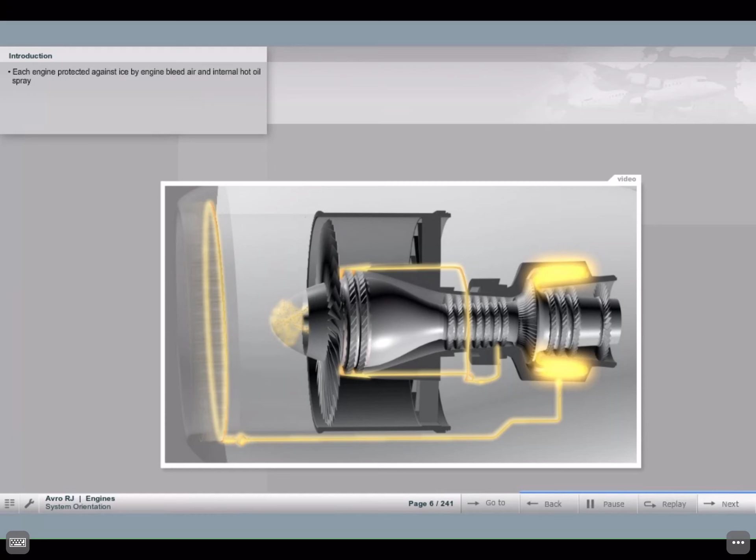Each engine is protected against ice by the use of engine bleed air and internal hot oil spray. An overheat detection system provides fire warnings, and 2 fire extinguishers on each engine may be used to stop the spread of fire.

The engine is comprised of 4 modules: a fan module, a gas producer module, a combustor turbine module, and an accessory gearbox module.

The air passing through the fan is divided by a splitter. Most of the air is accelerated through the bypass duct, generating most of the engine's thrust. The remaining air is compressed by a 2-stage low-pressure compressor called a supercharger and delivered to the gas producer module.

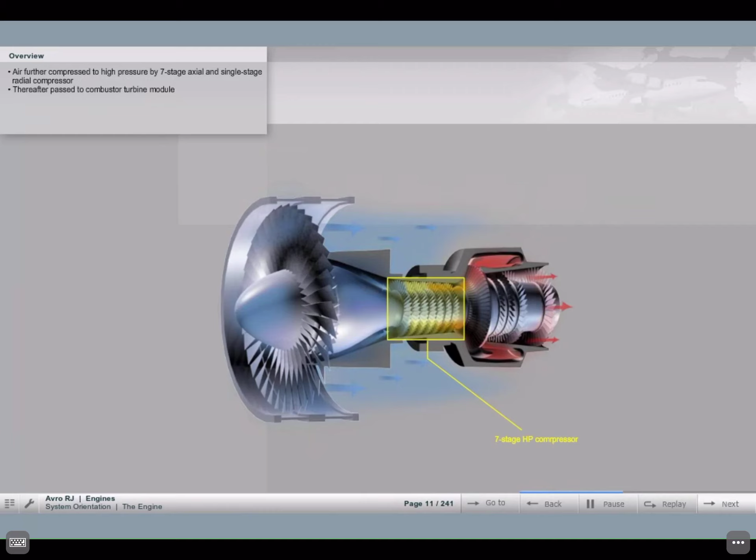Here, air is further compressed to high pressure by a 7-stage axial compressor and a single-stage radial compressor, before being delivered to the combustor turbine module.

Fuel is delivered into the combustion chamber by multiple fuel nozzles. The fuel-air mixture is ignited and exits via a 2-stage high-pressure turbine, which drives the high-pressure compressor stages.

Before exiting to atmosphere via the jet pipe, the hot gases are passed through a 2-stage low-pressure turbine, which drives the 2-stage supercharger and a fan via a reduction gearbox.

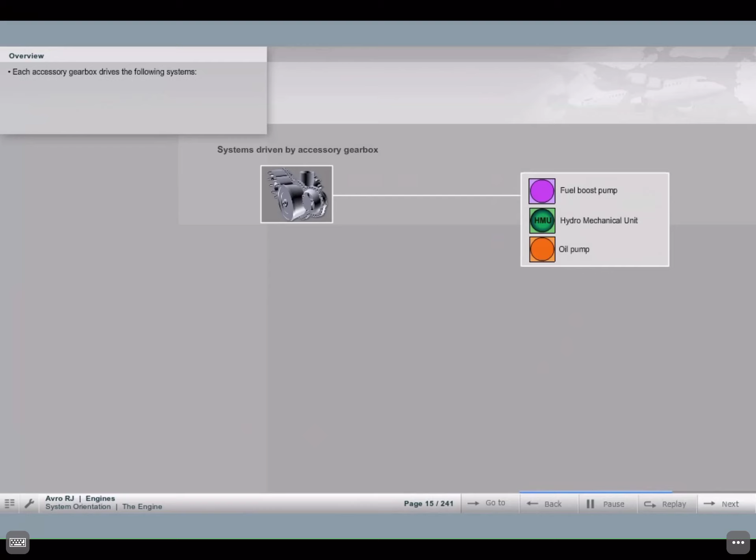Each engine is fitted with an accessory gearbox which is driven by the high-pressure shaft. The systems driven from the accessory gearbox differ depending on the position of the engine. Each accessory gearbox drives a fuel boost pump, a hydromechanical unit (HMU), and an oil pump. In addition, it drives a hydraulic pump on the inboard engines or an AC generator on the outboard engines.

For engine start, a starter motor is fitted to each accessory gearbox. A drain mast is fitted to the bottom of each engine cowling and contains sealed drain lines for the system shown here.

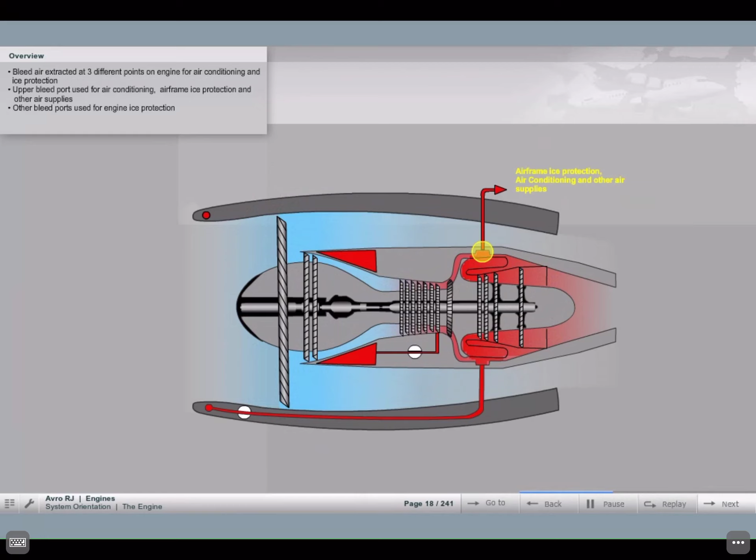Bleed air is extracted from 3 different points on the engine for air conditioning and ice protection. The upper bleed port is used for air conditioning, airframe ice protection, and other air supplies. The other bleed ports are used for engine ice protection.

Engine anti-ice. The fan spinner is continuously anti-iced by an internal oil spray. The air intake lip and the airflow splitter are separately anti-iced by hot bleed air taken from the final stages of compression.

Hot air can be bled via 2 engine anti-ice valves on each engine, controlled by a single switch on the ice protection panel. The valves are pneumatically actuated and electrically powered shut. Selection of engine anti-ice illuminates engine anti-ice on the central status panel.

When the airflow splitter anti-ice valve is open, engine valve not shut illuminates on the ice protection panel. This indicates that hot air is being delivered to the splitter.

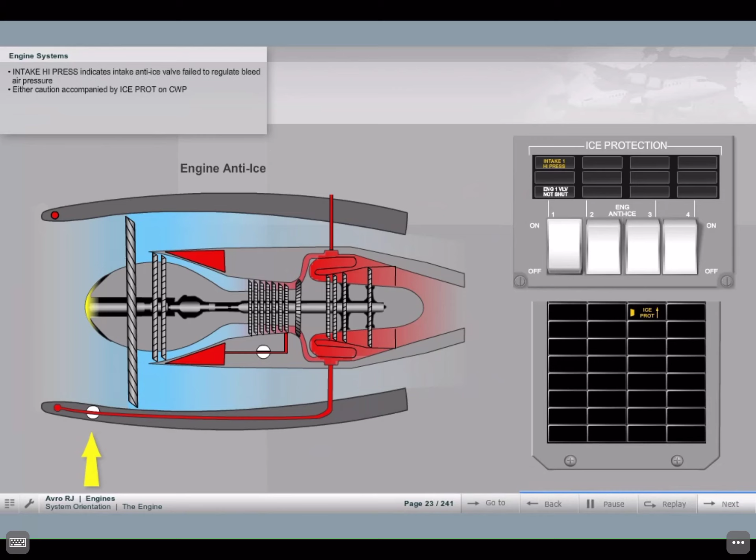To prevent engine surge, the engine anti-ice valves are automatically opened during engine start. To prevent high EGT after start or cutout, engine anti-ice is selected on before start.

Bleed band. In order to allow correct response of the engine during starting and periods of acceleration or deceleration, air is bled from the high-pressure compressor by opening and closing of a bleed band assembly, controlled from the FADEC.

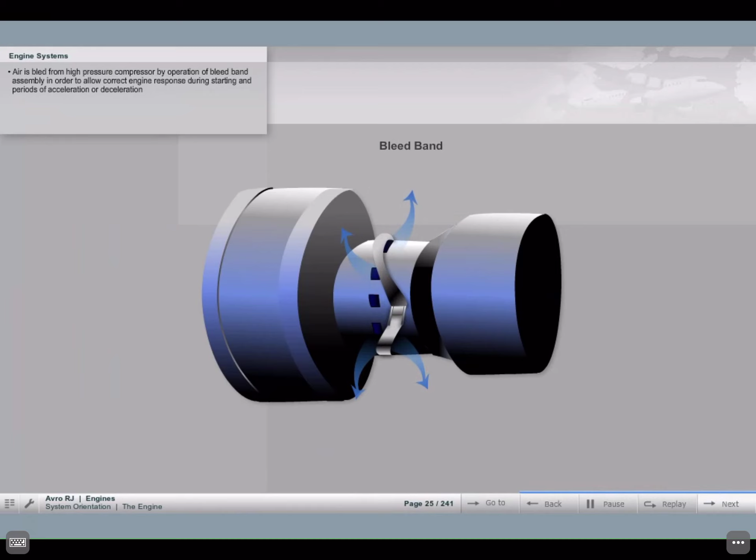Fuel system. Fuel is delivered by the AC boost pump in the wing feed tank via a low-pressure shutoff valve, which is controlled by the fire handle, to the engine-driven low-pressure fuel pump.

It then passes through a fuel heater to a low-pressure filter. Should the filter become blocked, filter clogged will appear on the central warning panel.

Fuel then passes through the hydromechanical unit (HMU), which contains a high-pressure pump, a high-pressure shutoff valve, and a metering valve which under normal operations is controlled by FADEC. The high-pressure shutoff valve allows the engine to be stopped and is directly controlled by the thrust lever. From the hydromechanical unit, fuel is fed to the fuel nozzles in the combustion chamber.

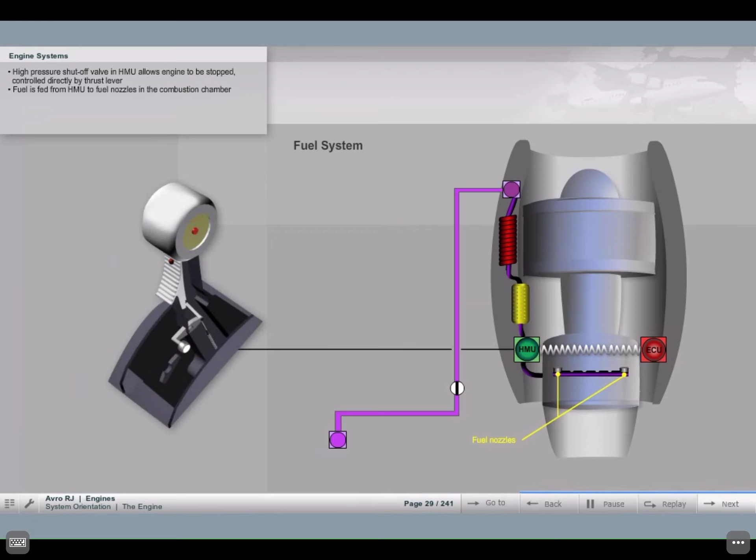Ignition. During engine start, ignition is provided by either ignition system A, B, or both. Ignition is automatically terminated when combustion becomes self-sustaining.

The ignition system is not normally used after engine starting, but continuous ignition A or B must be selected on when operating from contaminated runways and when flying through areas of severe turbulence or heavy precipitation.

Engine ignition is also used during in-flight engine start. This is covered in the engine starting module.

Oil system. The oil system is completely self-contained and includes an oil tank, oil pump, oil fuel heat exchanger, and an oil filter for each engine.

Oil is replenished at the oil tank, which contains a dipstick and a transmitter for the oil contents gauge on a flight deck triple gauge. The oil pump, which is located on the accessory gearbox, also contains the oil filter.

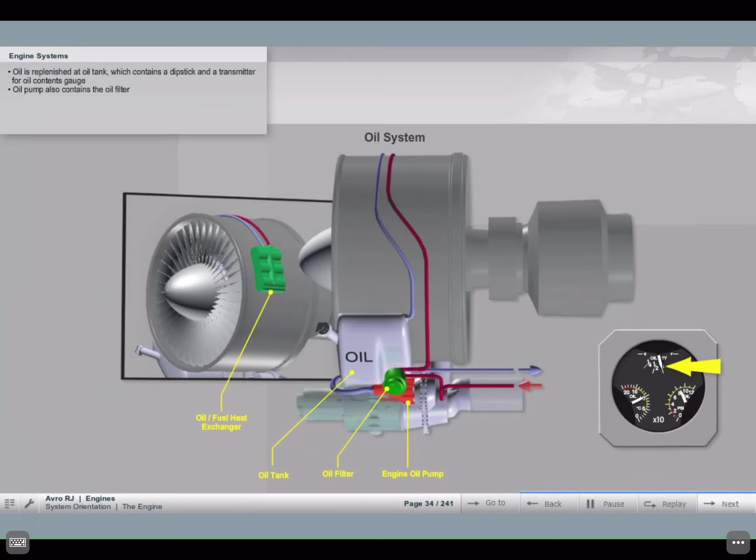Low oil pressure is indicated by oil low pressure on the central warning panel.

Each engine is divided into two zones for fire detection purposes. The area between the fan casing and the cowling is termed Zone 1. The area between the engine core and the core casing is termed Zone 2.

Each zone is equipped with two fire loops, designated Loop A and Loop B. Each pair of loops is connected together in parallel to form two independent detection systems.

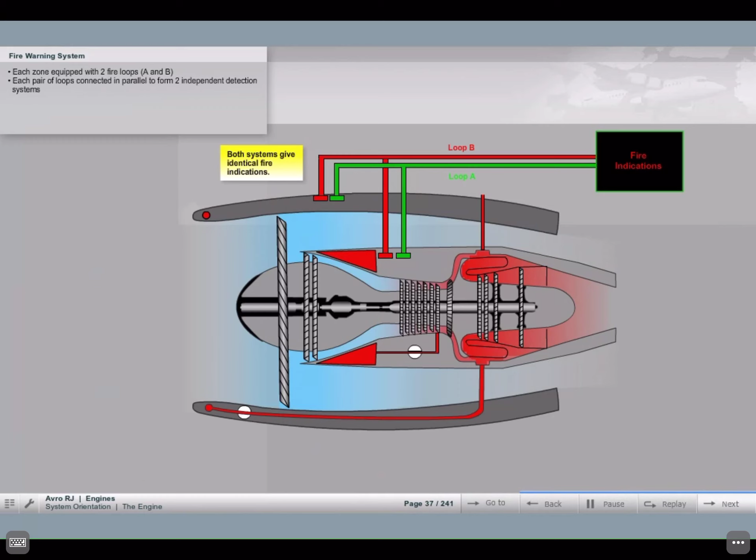Either pair of loops may be selected as the active detection system on the engine fire detect panel. Failure of a loop will illuminate loop fault for the appropriate engine on the central warning panel.

When an overheat condition is detected by the selected loop, the warnings shown here are given.

The fire bell and the red alert flashers may be canceled by pressing either of the red alert flashers. All the other warnings will cancel once the temperature at the sensor falls below a preset limit.

The fire warning system for each engine may be tested by the use of 4 engine fire test buttons on the ground test panel. Pressing an engine fire test button activates all fire warnings for that engine, plus the appropriate loop fault warning and both amber attention getters.

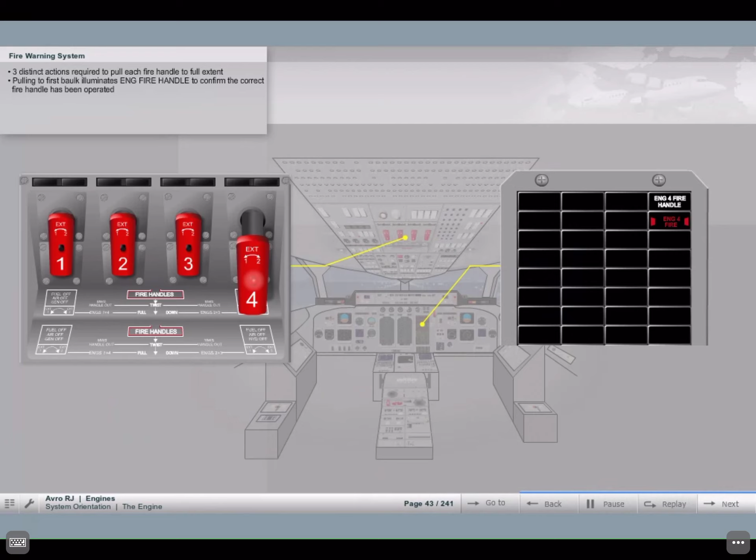Twisting the handle to pull it through the baulk and pulling it to its full extent achieves the actions listed here.

A fire extinguishing system is fitted in Zone 1. A fire in Zone 2 may only be extinguished by shutting the engine down.

Two fire extinguishers are fitted in the nose cowl of each engine and are electrically activated to operate independently by turning each fire handle either anti-clockwise, shot 1, or clockwise, shot 2, after the handle has been pulled to its full extent.

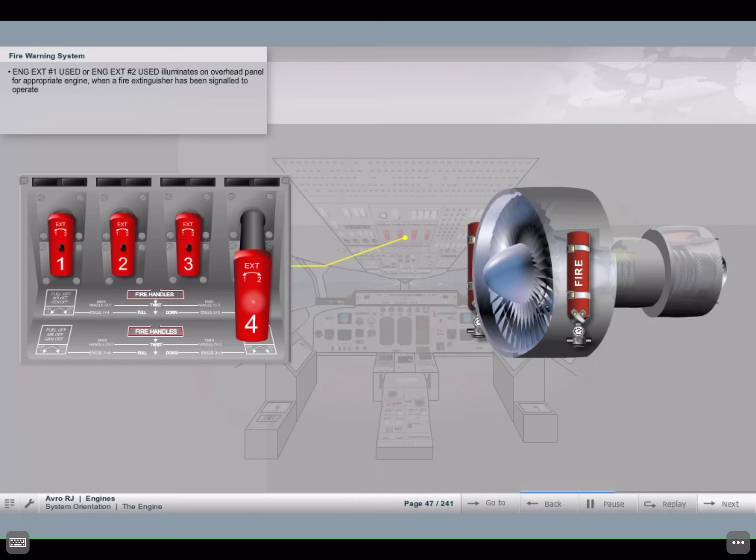Confirmation that a fire extinguisher has been signaled to operate is given by either extinguisher number 1 used or extinguisher number 2 used, illuminating on the overhead panel for the appropriate engine.

These extinguisher used indications may be tested by pressing the engine and APU extinguisher test button on the ground test panel. APU extinguisher used also illuminates on the APU panel.

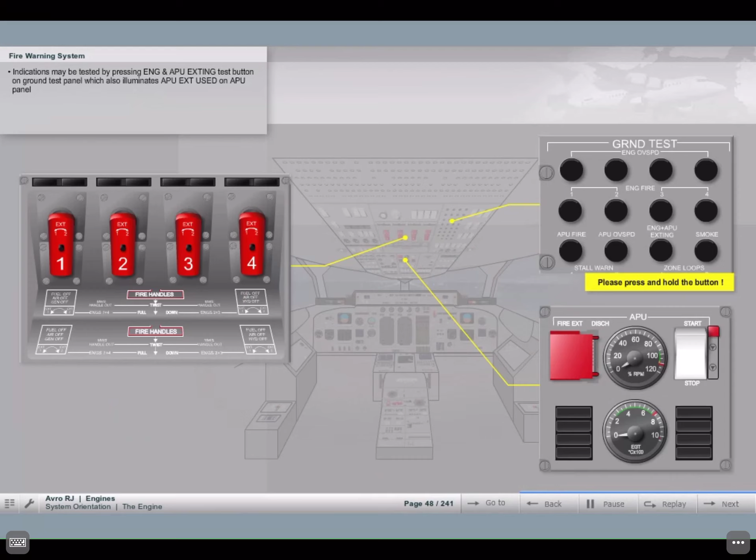To protect against extinguishant thermal expansion, each fire bottle is provided with a pressure relief valve and indicator on the inboard and outboard side of each nose cowl.

These indicate red if a fire bottle has discharged due to thermal expansion.

Two fire access and pressure relief doors are also fitted on each engine.

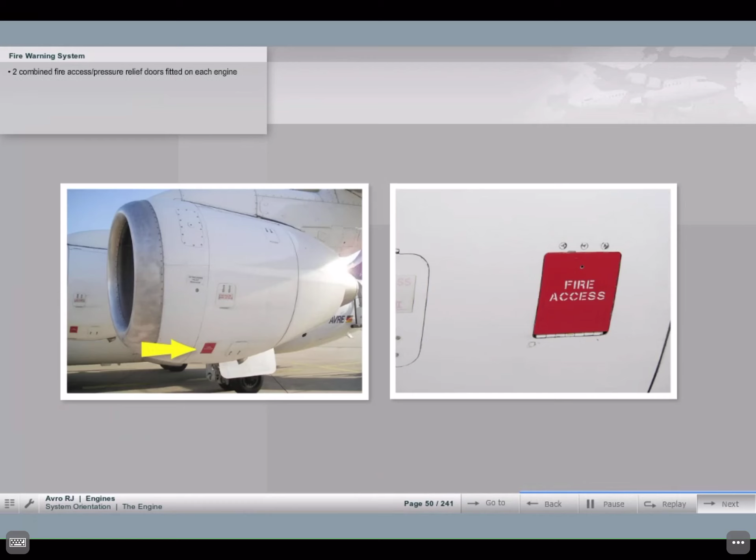Engine vibration level, fan speed N1, exhaust gas temperature EGT, gas generator speed N2, fuel flow, fuel used, and fuel contents are indicated by the primary engine display, PED.

Oil contents, temperature, and pressure are indicated on 4 separate so-called triple gauges.

Engine vibration. This is indicated in inches per second. An indication exceeding 1.2 inches per second for more than 2 seconds will activate the engine vibration warning on the central warning panel.

Operation of the vibration test button on the center panel causes the vibration level to increase to 2.0.

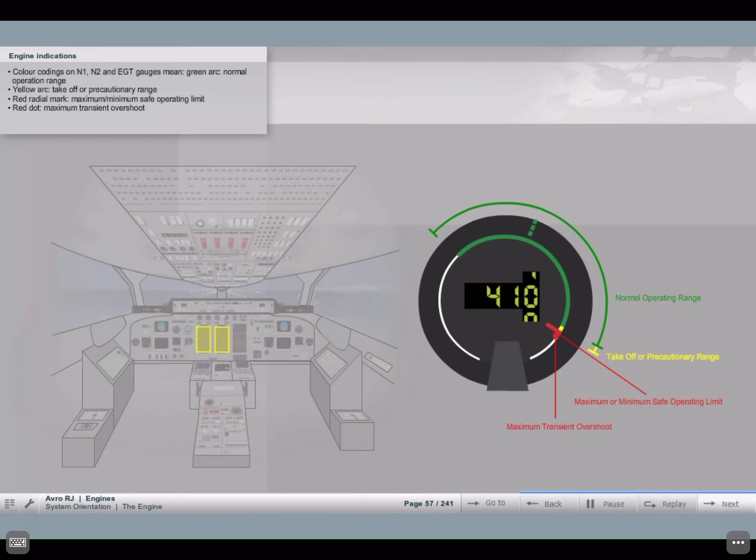N1 is indicated as a percentage of maximum fan speed. The maximum operating limit, which is both the takeoff and maximum continuous limit, is 97%.

Actual N1 is indicated by a pointer. When actual N1 matches commanded N1, the pointer lies within the command bug. A transient overshoot of 100% is permitted for a maximum of 10 seconds.

EGT: gas temperature measured in a jet pipe is indicated in degrees Celsius. The normal operating range extends to 613 degrees Celsius, defined as maximum continuous thrust, MCT.

The takeoff range extends to 632 degrees Celsius and is indicated by the yellow arc. The maximum operating limit of 649 degrees Celsius is defined as the EGT limit during engine start and wind shear recovery.

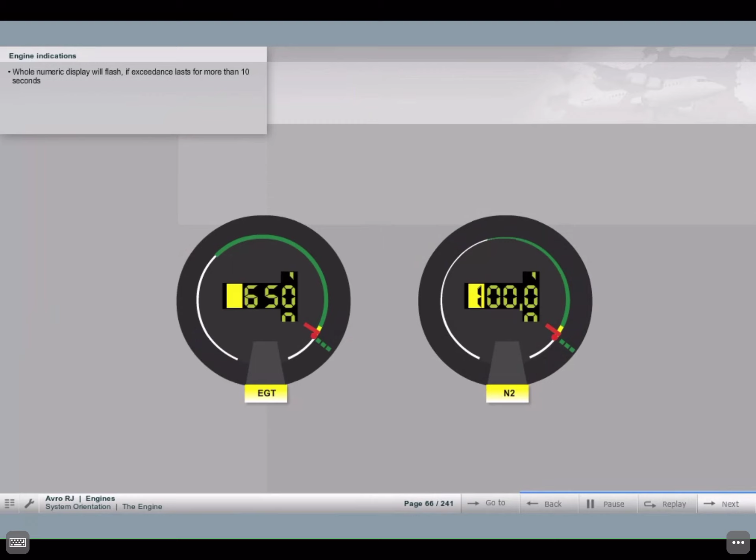Fuel used and fuel flow. When no fuel flow is present, the display shows kilograms or pounds, dependent on the aircraft configuration. After engine start, fuel flow is indicated.

When the push Fuel Used button is pressed, the display shows fuel used.

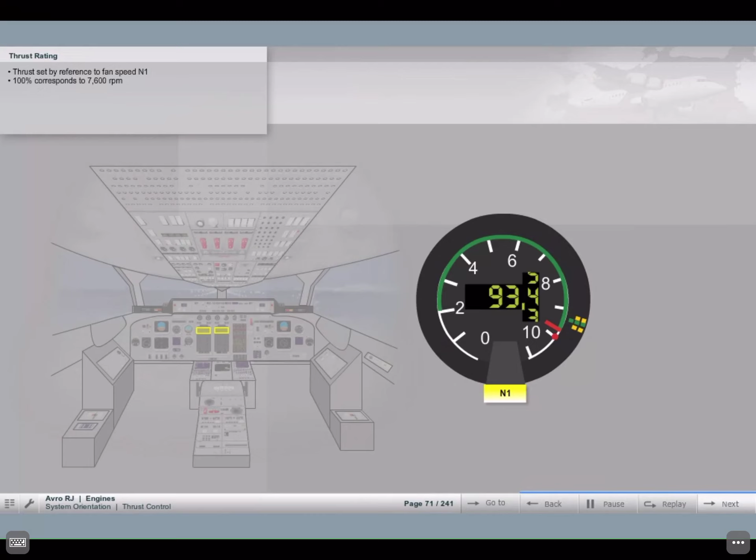At sea level, at 23.3 degrees Celsius with a standard pressure setting, 95.1% N1 will give the rated thrust of 7,000 pounds. Below this temperature at 95.1% N1, thrust will increase above rated thrust.

To prevent engine damage, thrust is limited to 7,000 pounds below 23.3 degrees Celsius by limiting N1. This is known as flat rating.

Above 23.3 degrees Celsius, thrust falls as the density of the air decreases, and the takeoff EGT limit of 632 degrees Celsius is maintained. This is known as full rating.

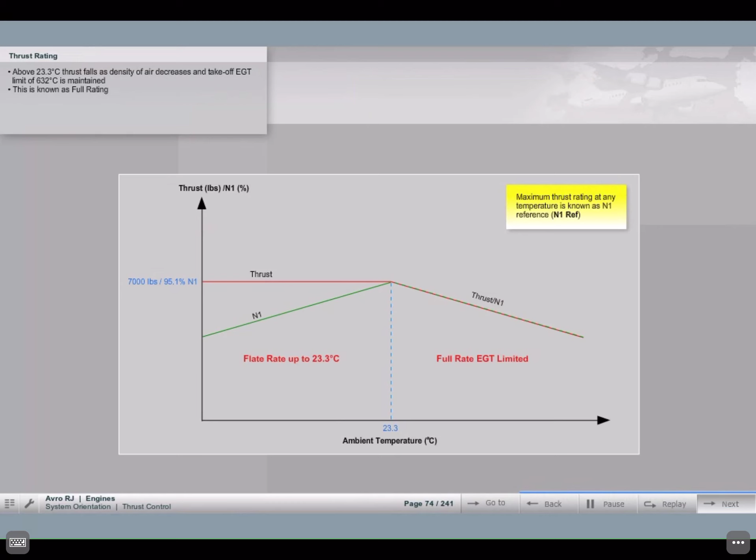Fan overspeed protection: if N1 exceeds 104%, the engine will automatically shut down and the caption 'Engine Overspeed' will light on the central warning panel.

An engine overspeed test button is provided on the ground test panel, which multiplies actual N1 by 4 and feeds the signal to the overspeed controller on the appropriate engine.

The thrust control system is comprised of the thrust levers, full authority digital engine control (FADEC), the thrust rating panel (TRP), and the auto throttle.

Thrust levers: each engine is controlled by an individual thrust lever. It is fitted with a baulk to prevent inadvertent closure of the high-pressure fuel valve when the engine is at idle.

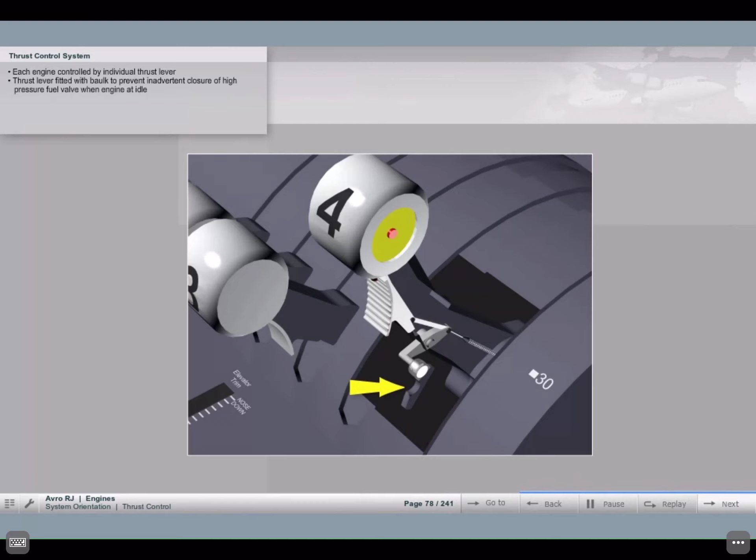A trigger mechanism fitted to each thrust lever allows the baulk to be passed and the fuel valve to be closed.

Between fuel off and idle is an intermediate fuel on position, which is used during a FADEC off start.

The thrust lever is mechanically linked by cables to the HMU.

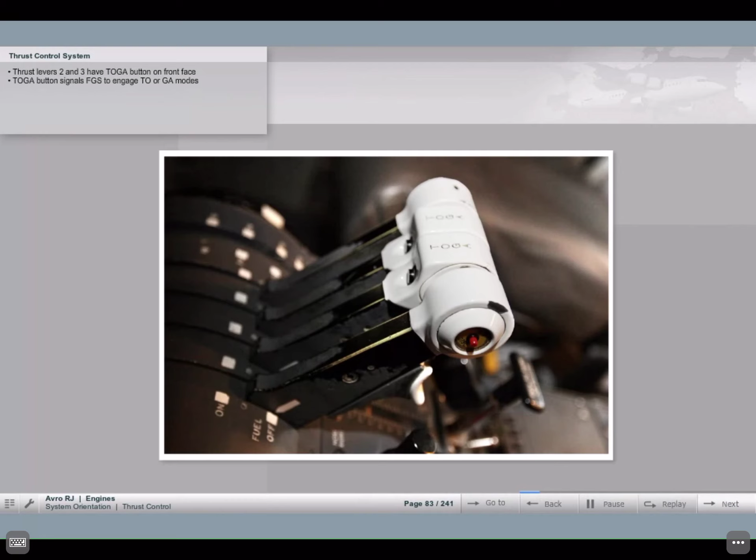Numbers 1 and 4 thrust levers have an auto throttle disconnect button on each outer side. Numbers 2 and 3 thrust levers have a TOGA button on their front face.

This button signals the flight guidance system to engage the takeoff or go-around modes. A fire warning light is fitted in each thrust lever.

FADEC: the FADEC system consists of a hydro-mechanical unit and electronic control unit on each engine and provides the functions listed here.

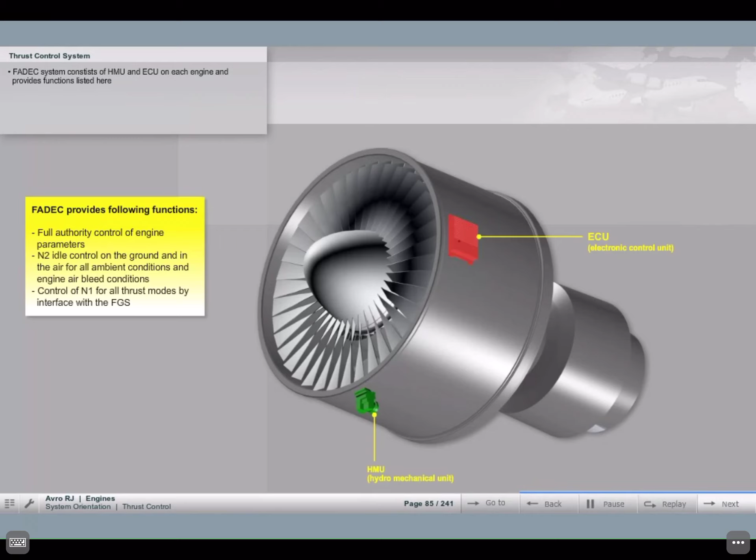During FADEC manual reversion, the fuel metering valve within the HMU is mechanically controlled.

Under FADEC control, the mechanical link is broken and the thrust lever angle is electrically transmitted to the ECU, which then electrically controls the metering valve within the HMU.

FADEC trim control of N1 is between 5% at high thrust settings and 18% at low thrust settings.

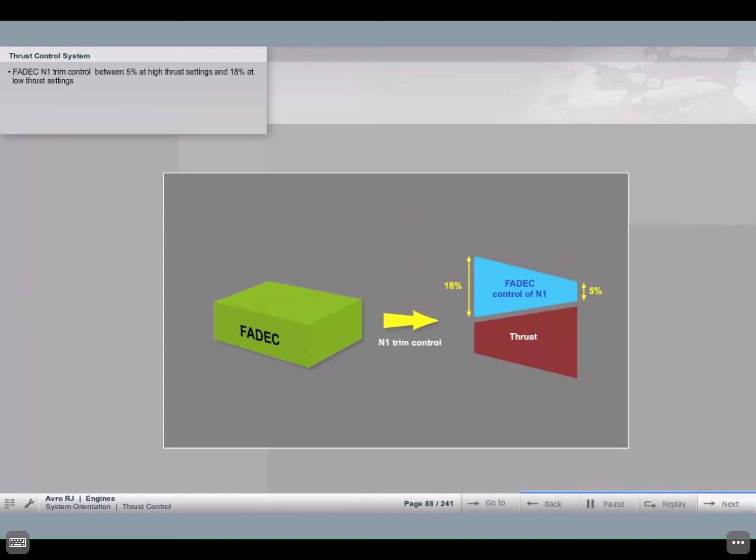The FADEC status panel above the PED contains the FADEC trim arrows and the FADEC fault indicators for each engine. The fault annunciator illuminates to indicate a FADEC failure. FADEC will also illuminate on the central warning panel. FADEC is selected off by pressing the fault annunciator.

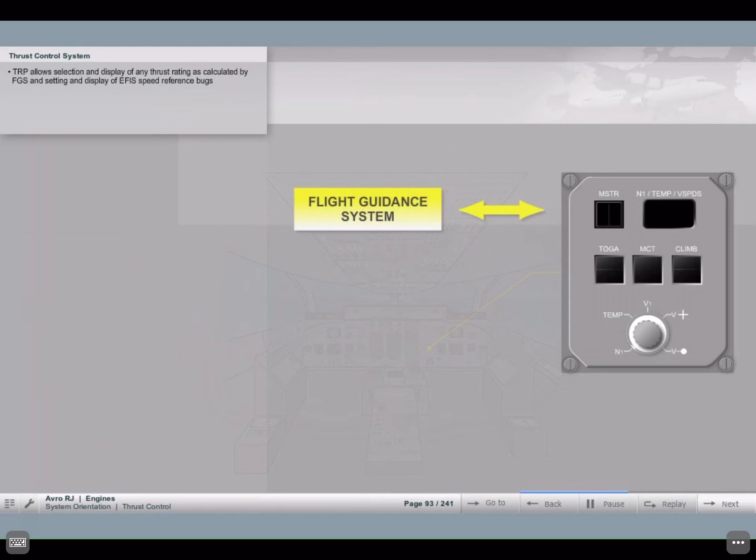Thrust rating panel. The TRP provides an interface between the pilot and the thrust control system. It allows the selection and display of any thrust rating as calculated by the flight guidance system and the setting and display of the EFIS speed reference bugs.

In order to extend engine life, a takeoff thrust below maximum rated thrust can be used. This is done by basing the takeoff thrust calculations on an assumed temperature which is higher than ambient, which produces a lower thrust. This is called a flexible thrust technique.

When the aircraft is on the ground, the TRP is selected by pressing the TOGA button. In flight, pressing any of the buttons on the front of the TRP will select it on. Selection of TRP modes provides appropriate N1 targets to FADEC and for display on the flight deck. Click on the TRP thrust mode buttons to view information about each mode.

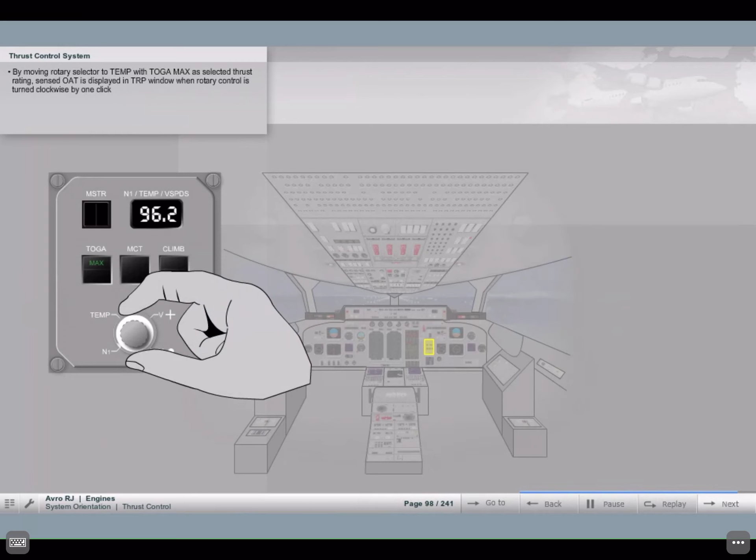A correction to OAT may be made using the rotary control. The flight guidance system uses the highest of the set and sensed temperature in its calculation of N1 ref.

With TOGA reduced selected on the TRP, the temperature displayed will be T reduced, a standard increase over OAT.

N1 reduced is now displayed on the TRP.

T reduced may be manually amended to any temperature above OAT to produce T flex and a related N1 flex.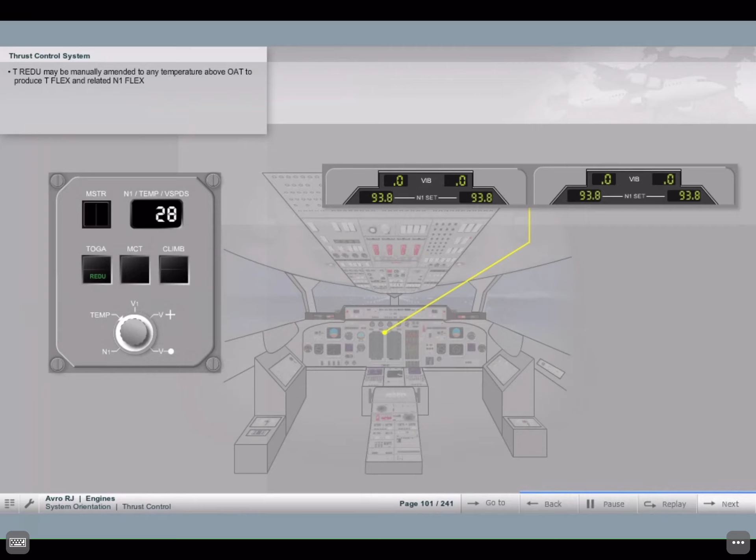Due to manufacturing differences, each engine produces a different thrust for a given N1. To ensure that rated thrust is not exceeded at the maximum indicated N1, an electrical bias is applied to the N1 signal by FADEC to make all four engines appear to be at the same N1 without exceeding maximum rated thrust.

When equal thrust is required, compensation is applied to the N1 signals to the primary engine display and the flight guidance system. This occurs when either TOGA or MCT are selected on the TRP. Equal thrust is then achieved by each engine at apparent equal N1s.

With climb norm or climb max selected on a TRP, the compensation is removed to synchronize the engine's true N1s and so reduce cabin noise.

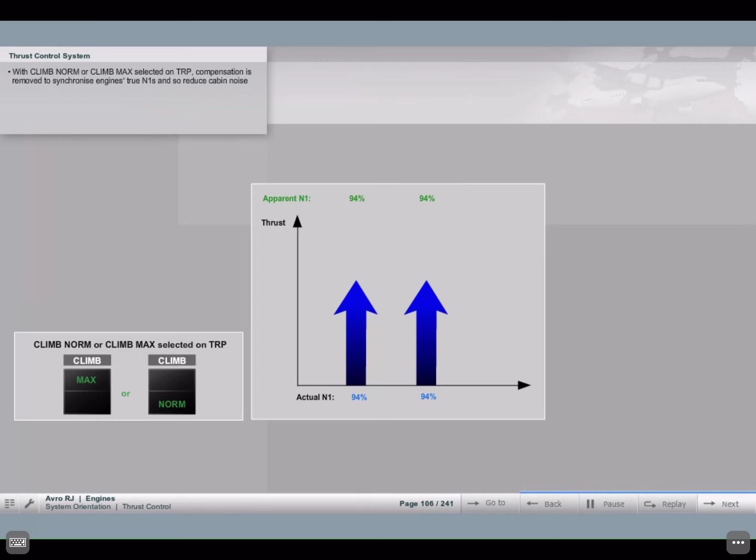The TRP rotary selector is also used to enter the bug reference speeds V1, V cross, and V dot on the EFIS speed tape.

When V1 is selected on the TRP, a bug is placed against the speed tape and the V1 speed is repeated at the bottom of the speed tape. The V1 speed and bug disappear when the aircraft is in flight.

The TRP is selected off by pressing either the auto throttle disconnect buttons on the end of the thrust levers 1 and 4 for longer than 3 seconds.

Auto throttle, the link between the flight guidance system and the auto throttle servo motor adjacent to the thrust levers, allows full authority thrust control by the flight guidance system.

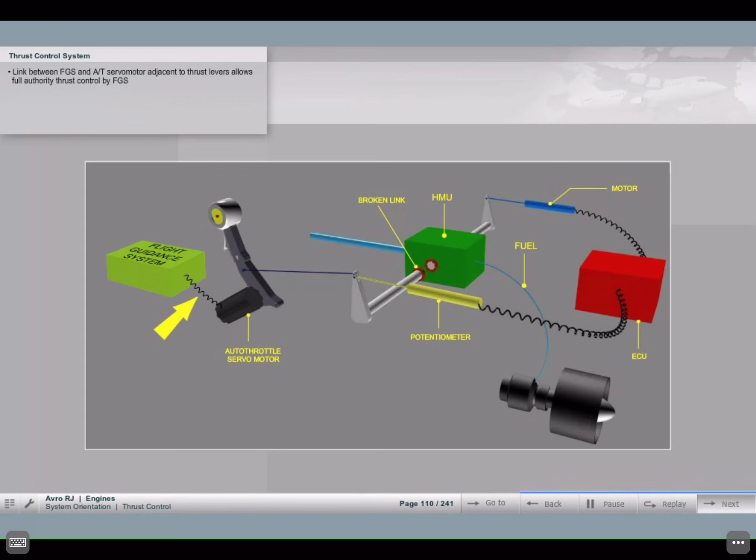The auto throttle is selected on arm using the switch on the mode control panel. This can only be done if the TRP is on.

Indication of autothrottle engagement is given by the green light adjacent to the switch on the MCP, and AT in white meaning armed, or green meaning active on the PFD.

The autothrottle is disengaged by using either of the autothrottle disconnect buttons on the thrust levers 1 and 4, or by deselecting the autothrottle arm switch on the MCP.

When the autothrottle is manually disengaged, AT on the flight annunciator illuminates for 4 seconds, and AT on the EFIS flashes for 4 seconds.

An automatic autothrottle disengagement is indicated by the same warnings, but they will remain on until canceled by pressing either autothrottle disconnect button on the thrust levers.

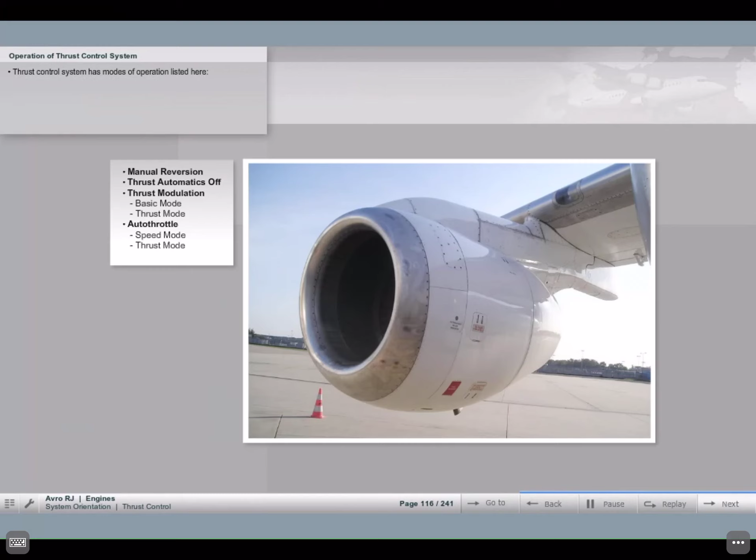Manual reversion. This is the most basic form of thrust control, which is made by movement mechanically linked to a fuel valve within the HMU of each engine.

No engine parameter limitation protection is available apart from fan overspeed protection at 104% N1.

N2 ground idle will be between 49 and 75%. In flight, the pilot must ensure that minimum N2 is manually set.

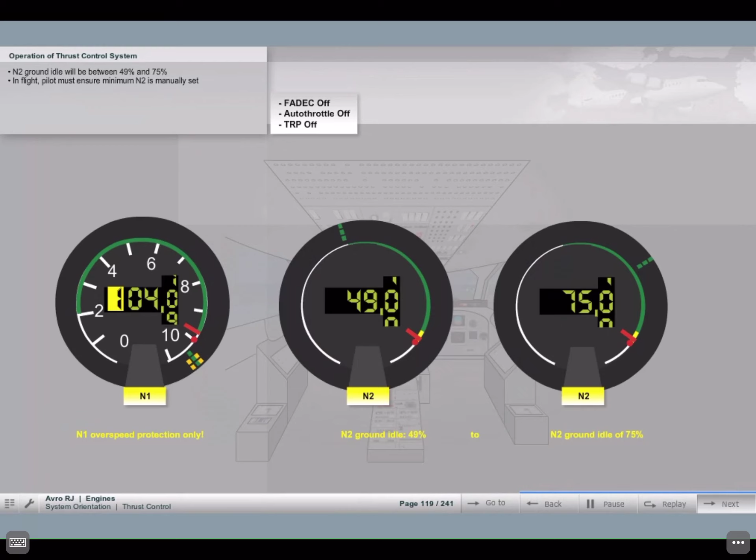Thrust automatics off, the FADEC is selected on. The thrust lever's control of the fuel metering valve in the HMU is disconnected, and the electronic control unit now controls the metering valve electrically.

The introduction of FADEC allows greater engine control and performs engine limitation protection and N2 idle control. N1 is limited to 97%, N2 is limited to 98.8%, and EGT is limited to 649 degrees Celsius.

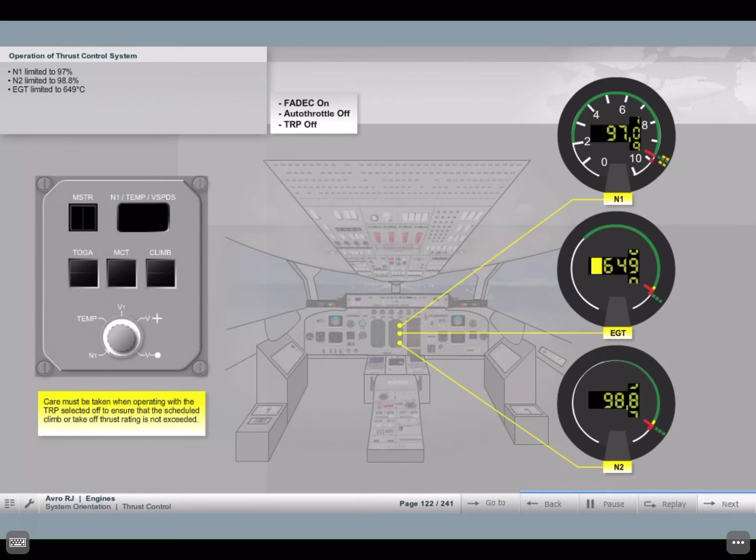Ground idle is controlled to 50% N2, but depending on environmental conditions, it may be between 49 and 54%. To guarantee engine acceleration, minimum flight idle is 60% N2.

To ensure that sufficient air is still available to provide air conditioning when bleed demands are placed on the engine, a minimum N2 must be determined for all bleed conditions at all altitudes. This is known as the N2 floor schedule and is automatically provided by FADEC.

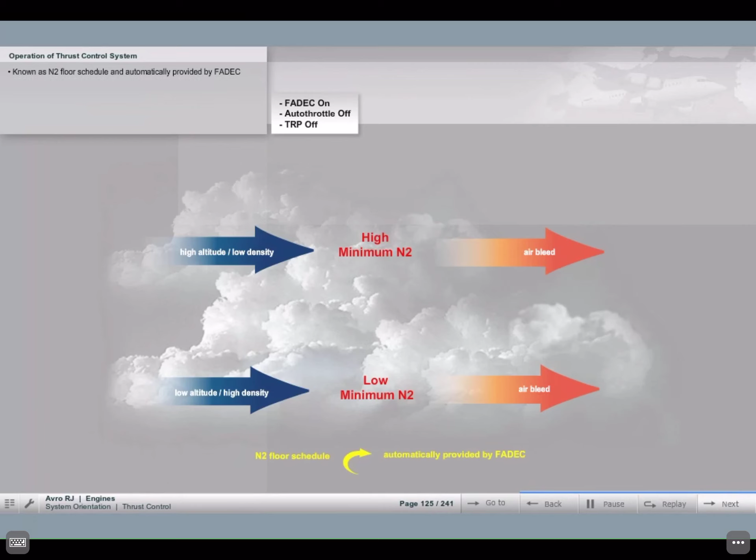The minimum N2 in flight with engine anti-ice selected on is 67%, but reduces to 60% below 200 feet radio altitude.

Thrust modulation. Selecting the TRP on raises the thrust control system to the thrust modulation level and provides a link between the flight guidance system and FADEC.

The FADEC now has a limited control authority as demanded by the flight guidance system and provides limitation protection for N1, EGT, and N2 in all modes with the following exceptions. When wind shear is detected, 649 degrees Celsius EGT is allowed rather than the normal takeoff limit of 632 degrees Celsius.

Independent of which thrust rating is selected on the TRP, with the auto throttle off, 632 degrees Celsius becomes the FADEC limit. The pilot is responsible for preventing the engines from exceeding the maximum continuous thrust limit of 613 degrees Celsius in MCT or climb thrust ratings.

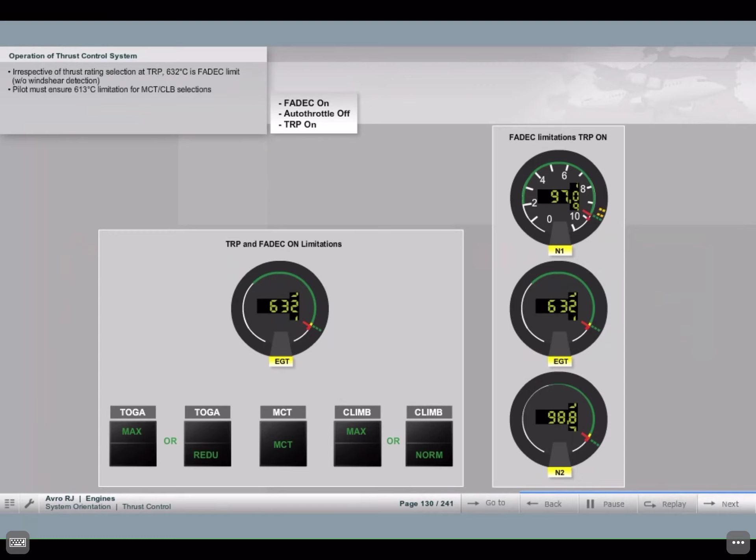Basic mode. This mode is entered when climb norm or climb max is selected on the TRP. All the N1s are synchronized to the N1 of the master engine, as selected by the master switch on the TRP.

If any thrust lever is moved away from the master engine, FADEC will eventually reach the limit of its trim authority and the pilot must advance or retard the thrust lever as indicated by the arrow on the FADEC status panel. A blue arrow indicates the thrust lever should be advanced, and a white arrow it should be retarded. The arrow will extinguish when FADEC authority is regained.

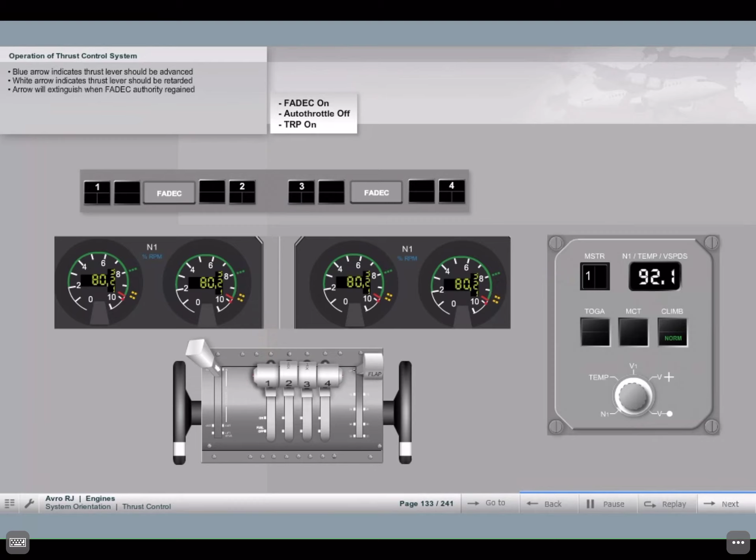Thrust mode. The thrust mode is entered from the basic mode by either selecting level change, climb on the MCP, or selecting any thrust mode on the TRP. When the thrust mode is entered, FADEC will control N1 within its control authority. The blue arrows will again appear when the limit of control authority is reached.

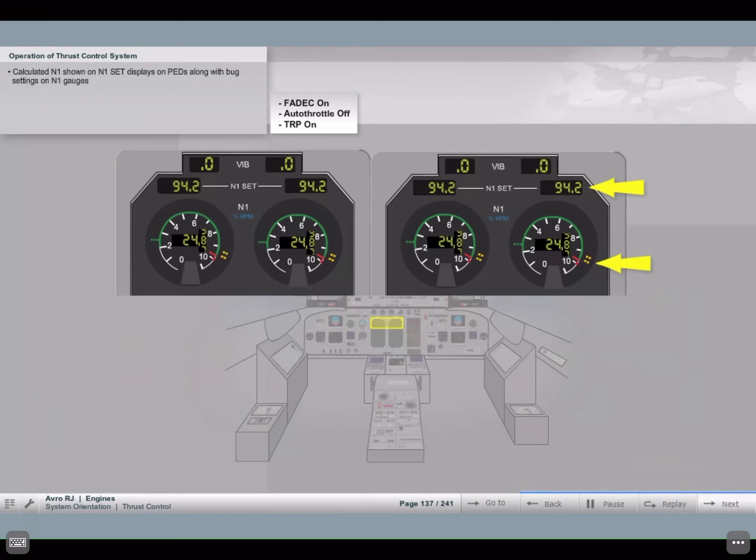The current thrust mode will be displayed in the top left-hand corner of the PFDs, white when the mode is armed and green when it is engaged. The calculated N1 is shown on the N1 set displays on the PEDs, along with the bug settings on the N1 gauges. The following thrust modes are available.

Auto throttle. In auto throttle mode, the flight guidance system controls N1 to a thrust schedule by moving the thrust levers using the servo motor instead of commanding the pilots with trim arrows. The auto throttle may be overridden at any time by manually advancing or retarding the thrust levers.

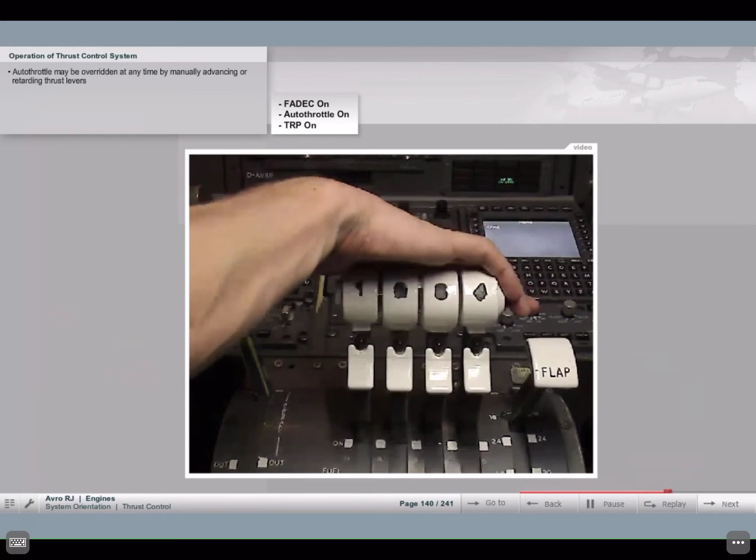Auto throttle speed mode. In the auto throttle speed mode, the auto throttle controls N1 to maintain either Mach or indicated airspeed as selected on the MCP.

Retard mode is entered after either a selection of level change, during descent, or automatically when radio altitude is below 50 feet.

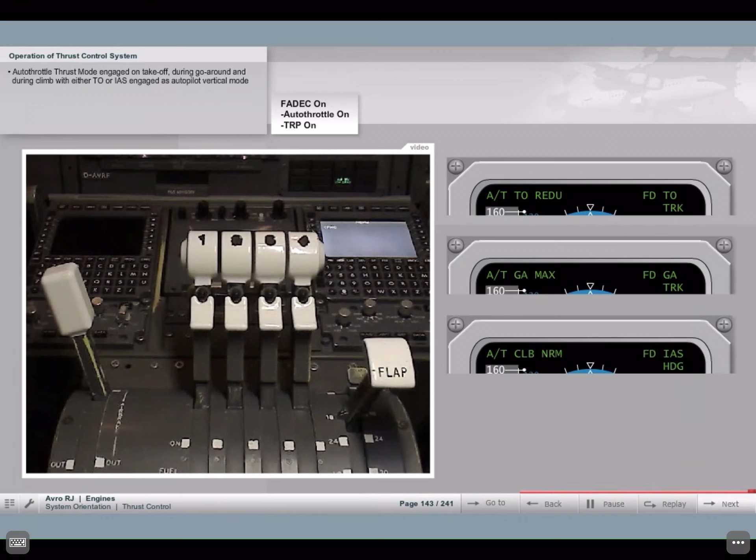Engine life computer. The engine life computer records certain engine parameters both routinely and when engine limitations are exceeded. Engine parameters may also be stored by use of the Store Data switch. The fail annunciator illuminates either when the unit fails a built-in test or when the memory is greater than 80% full.

Click yourself through the external checks.

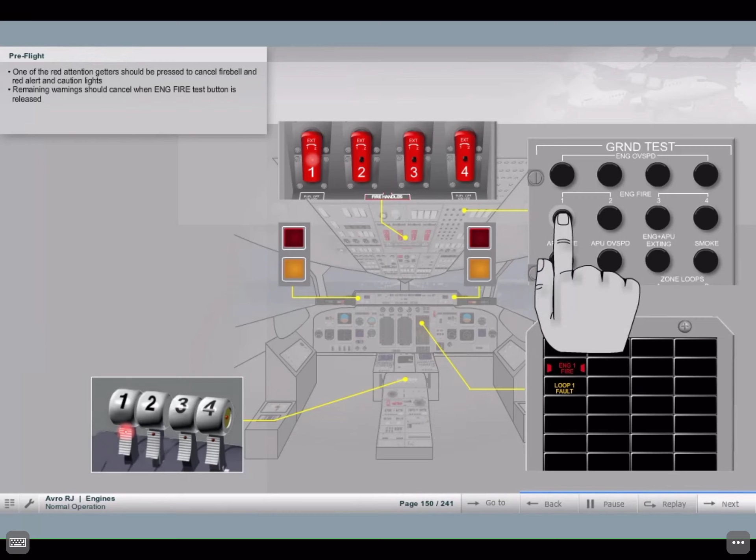The engine extinguisher used indications are now tested by pressing and holding the engine and APU extinguisher button on the ground test panel. The 8 engine extinguisher used captions illuminate while the test button is pressed. Note that this test also illuminates the APU extinguisher used caption on the APU panel.

The 4 fire handles are checked fully in.

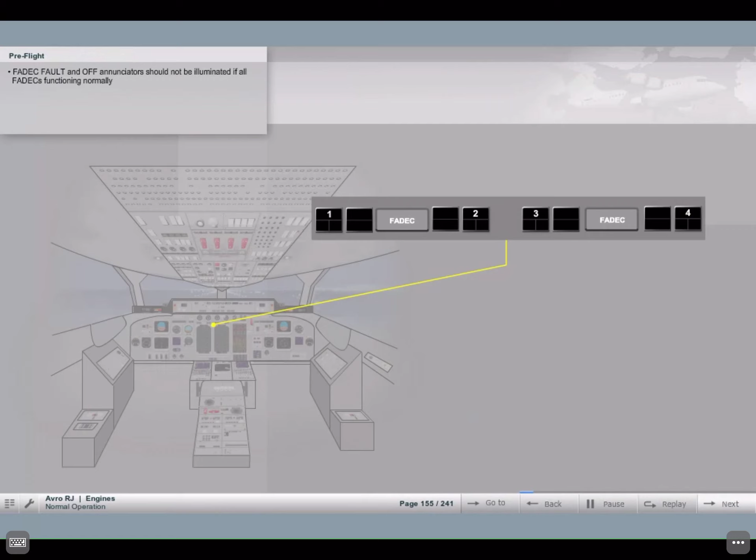The center panel is now checked. Each indicator of the oil triple gauges is checked for condition and the contents checked. The FADEC fault and off annunciator should not be illuminated if all the FADECs are functioning normally.

The engine vibration system is checked by pressing and holding the vibration test button on the center panel. The engine vibration indicators increase to 2.0 and engine vibration illuminates 2 seconds after the reading has risen above 1.2. When the button is released, the vibration level reduces to 0.

The N1 settings, both N1 ref and N1 reduced, dependent on the pressure altitude, temperature, cabin air bleed, and engine anti-ice condition, are calculated before takeoff.

With the rotary knob on the TRP selected to temp and a toga button selected to max, rotating the rotary controller by 1 click will display the sensed outside air temperature in the window. If this is different from the reported outside temperature, the reported temperature is entered in the window. The flight guidance system uses the lower of the 2 temperatures to calculate N1 ref.

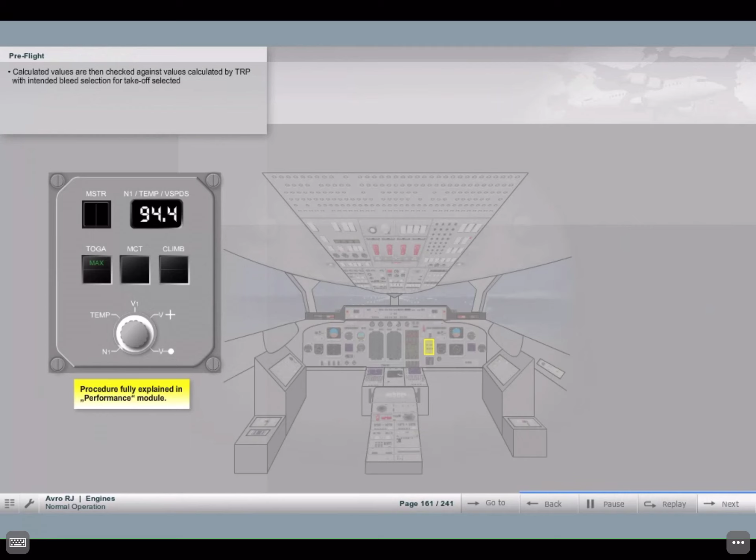The following configurations are permitted for takeoff: no bleeds, APU air selected on and packs on. Maximum thrust is available from the engines.

Cabin air on, engine air selected on and packs on. Discrete signals from any engine air switch and either pack switch combine to signal this configuration to the TRP.

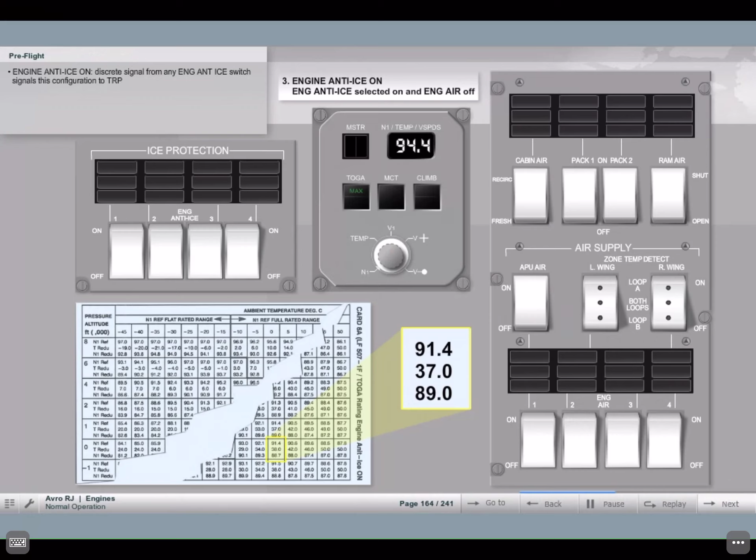Engine anti-ice on, engine anti-ice selected on and the engine air off. A discrete signal from any engine anti-ice switch signals this configuration to the TRP.

When this configuration is used, air conditioning is normally provided by the APU. The selection of APU air by itself does not affect the TRP calculated N1.

It is not permitted to select engine air bleeds and engine anti-ice simultaneously for takeoff. If an invalid bleed selection is made with a takeoff setting on the TRP, the N1 set numbers on the PED will flash.

If a reduced thrust takeoff is performed, N1 ref is normally manually set in the N1 set window on the number 1 engine for reference. N1 reduced appears in the other N1 set windows.

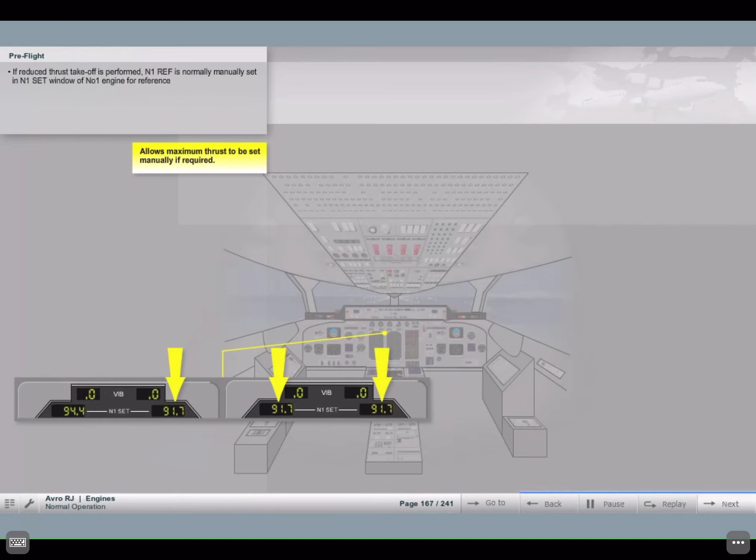The intended thrust rating for takeoff, either toga max or toga reduced, is set on the TRP. Note that the rating appears on the top left of the PFD.

Reduced thrust must not be used for takeoff with flap 33 or if the runway is contaminated with standing water, snow, slush, or ice.

During ground maneuvering and wind speeds greater than 15 knots, do not exceed 55% N1 except for takeoff.

The engine anti-ice must be on during all ground and flight operations when icing conditions exist, are anticipated, or if the ice-detected caption is illuminated.

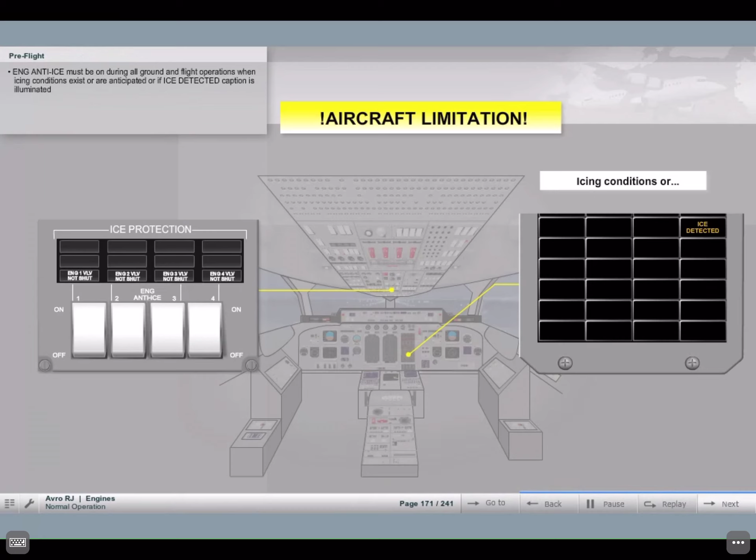Immediately before takeoff, the auto throttle may be armed by selecting the auto throttle switch to AT arm. The green light adjacent to the switch illuminates and AT appears next to the selected thrust mode on the PFD.

For takeoff, the thrust lever should be advanced to 45% N1 and either toga button pressed. The auto throttle mode displayed on the PFD will turn green and the thrust levers will advance to the target N1.

If achieved N1 is more than 1% below target N1, the takeoff should be abandoned.

When the wind speed is greater than 25 knots from a direction of 55 degrees or more off the runway heading, do not use toga reduced. Perform a rolling takeoff and set takeoff thrust when aircraft ground speed equals wind speed.

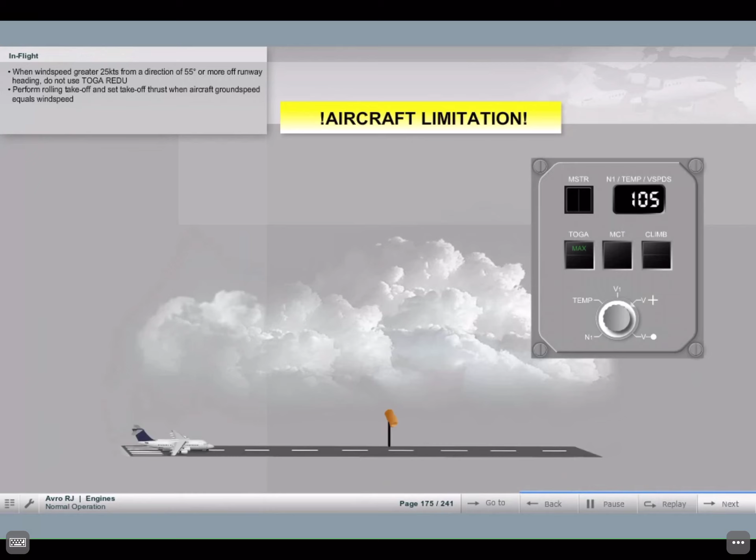Takeoff performance is scheduled on the basis that the thrust levers are not moved during the first and second segments of the takeoff.

At 80 knots, the thrust level calculated by the FADEC is frozen, and the auto throttle is clamped until 350 feet when FADEC unfreezes and the auto throttle enters the inactive armed mode.

The auto throttle remains in the armed state until a new thrust mode is selected by the pilot or is automatically entered by the flight guidance system.

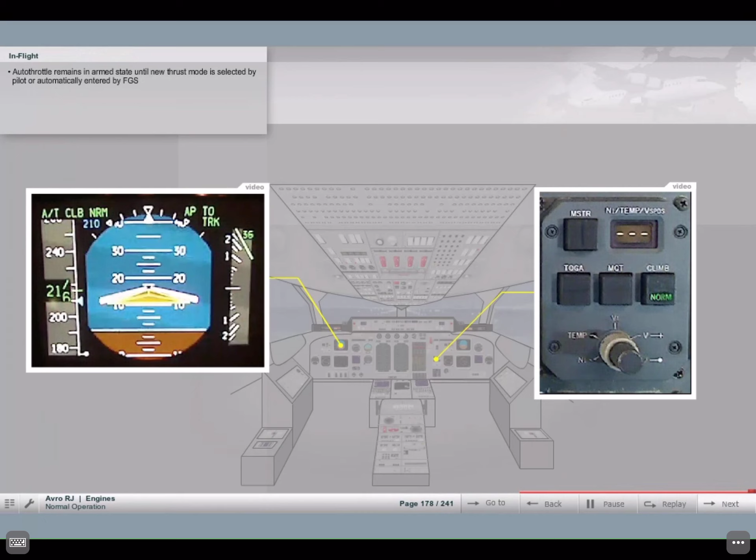Following an engine failure below 350 feet, if full thrust is required during a reduced thrust takeoff, a TOGA button must be pressed and the thrust levers manually advanced to the bugged value.

After flap retraction, thrust rating is set to climb norm by either pushing thrust on the MCP or selecting climb norm on the TRP.

N1 is now continually calculated for altitude and temperature by the flight guidance system. Climb norm normally remains selected on the TRP for the remainder of the flight.

After the flight guidance system has captured the selected altitude, the auto throttle now enters speed mode and thrust automatically reduces to maintain the selected IAS or Mach.

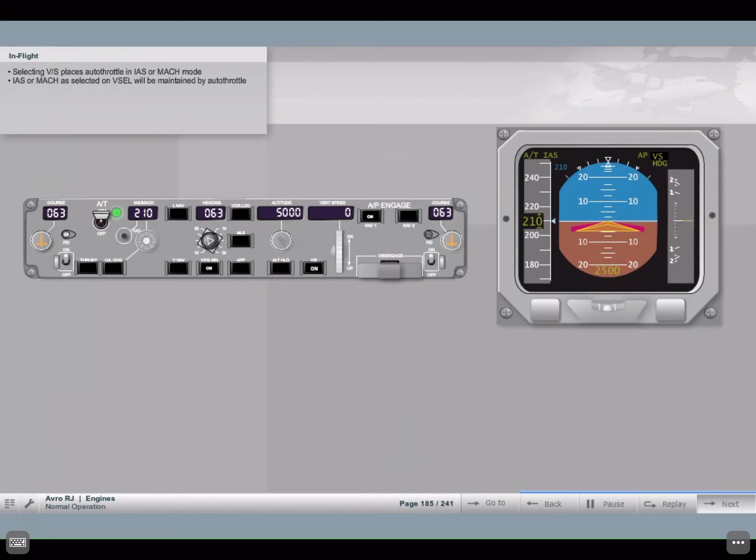During an ILS approach, when the autopilot is in glide slope mode, the auto throttle enters speed mode and controls the speed selected in the VSEL window.

At 50 feet radio altitude, the auto throttle enters retard mode irrespective of autopilot engagement. The auto throttle should be disconnected on touchdown before IAS is less than 60 knots.

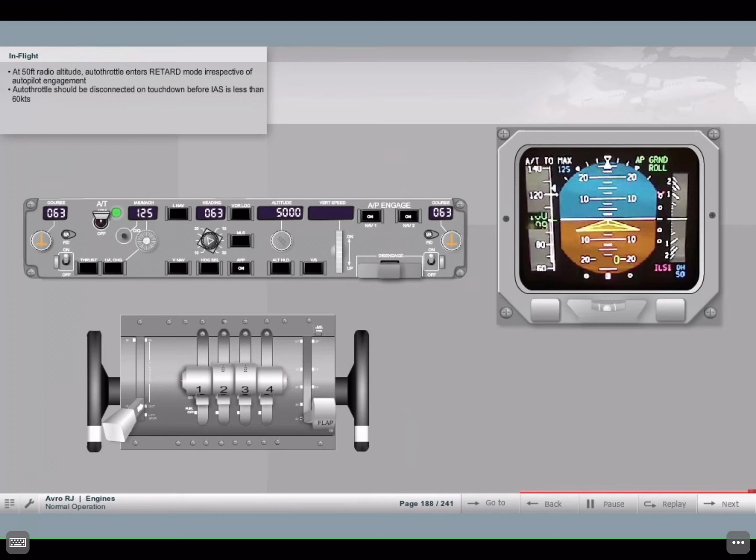If a go-around is initiated, the mode automatically reverts to GA max. This can be reduced to GA reduced by pressing TOGA on the TRP.

After checking the APU generator output, engines 1 and 4 may be shut down during taxi.

As a maintenance check, the pilot is required to test the fan overspeed shutdown system on each engine every day. The N1 of all engines should be increased to 30%.

The engine overspeed button on the ground test panel for the engine to be shut down first is pressed.

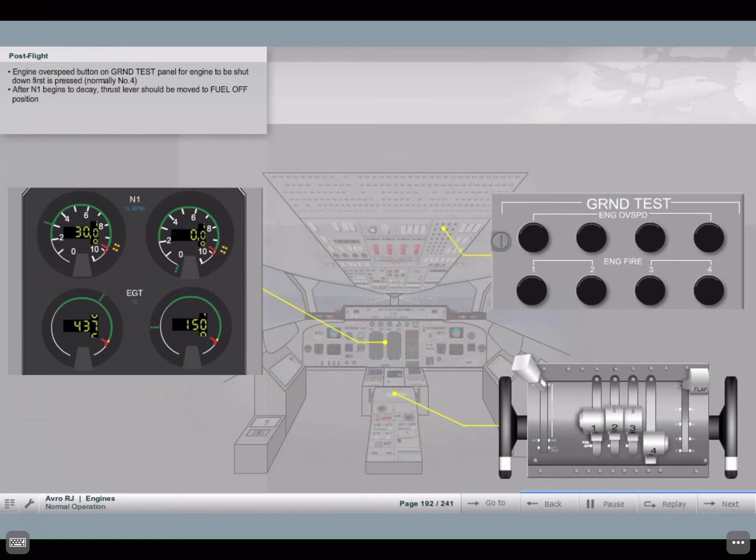Engine overspeed illuminates on the central warning panel. This indication should be cancelled by selecting Flight Start to On and Start Select to Engine 4.

The remaining engines may then be shut down using the appropriate engine overspeed buttons. Start Select is rotated to the relevant engine after each shutdown to cancel the central warning panel warning.

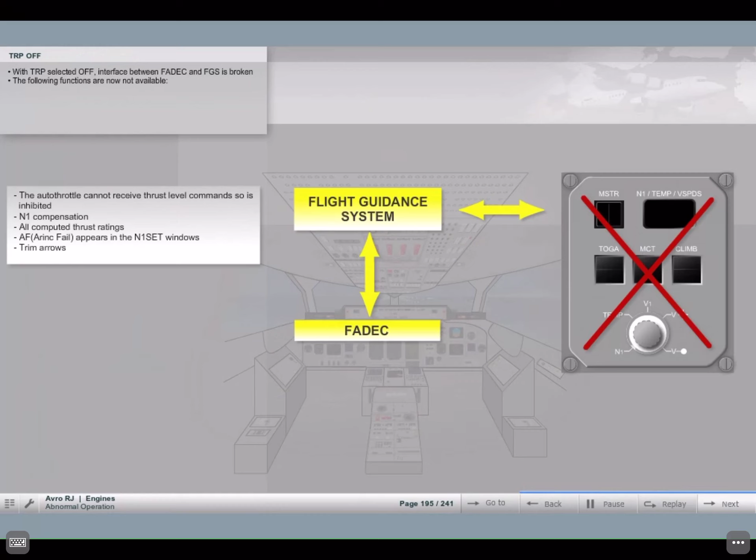With the TRP selected off, the interface between the FADEC and the flight guidance system is broken. The following functions are now not available: N1 ref and N1 reduced must be calculated using the tables provided in the checklist.

It must be noted that the N1 values presented in the tables of N1 for takeoff and go-around take into consideration N1 compensation.

Therefore, with compensation not available, 1% must be subtracted from the values derived from these tables before they are entered into the PED.

After takeoff, N1 should be manually set for the appropriate altitude and temperature as given in the tables and the MOM.

Every 5,000 feet, the thrust lever should be advanced to the tabulated value. The pilot must monitor the EGT to prevent exceeding 613 degrees Celsius.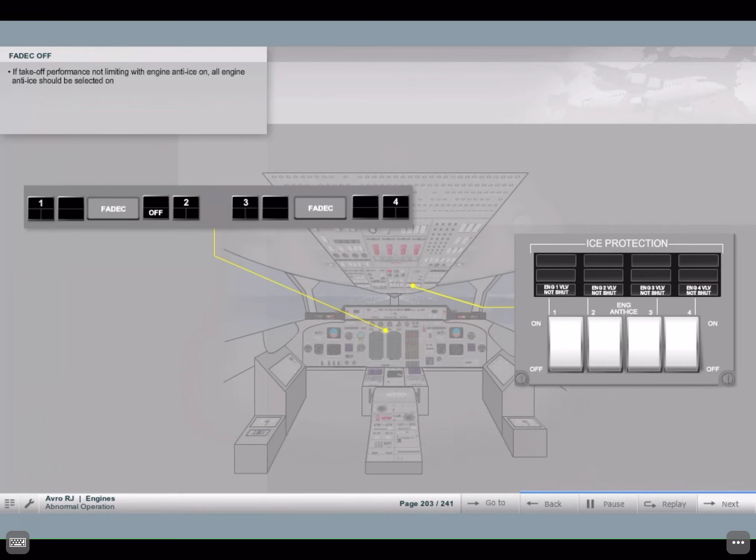If a single engine anti-ice is selected on, a discrete signal is sent to the TRP, which now assumes all engine anti-ice is selected on and calculates N1 accordingly.

In this case, the TRP must be selected off by pressing either auto-throttle disconnect button for more than 3 seconds.

N1 for engine anti-ice off should be calculated and manually set in the N1 set windows of the 3 unaffected engines. N1 for engine anti-ice on is set in the window of the affected engine.

If the TRP is used during climb, climb norm may be selected. The N1 of the affected engine should be matched with those of the other 3 engines.

During the descent, the N2 of the affected engine must be matched with those of the other 3 engines.

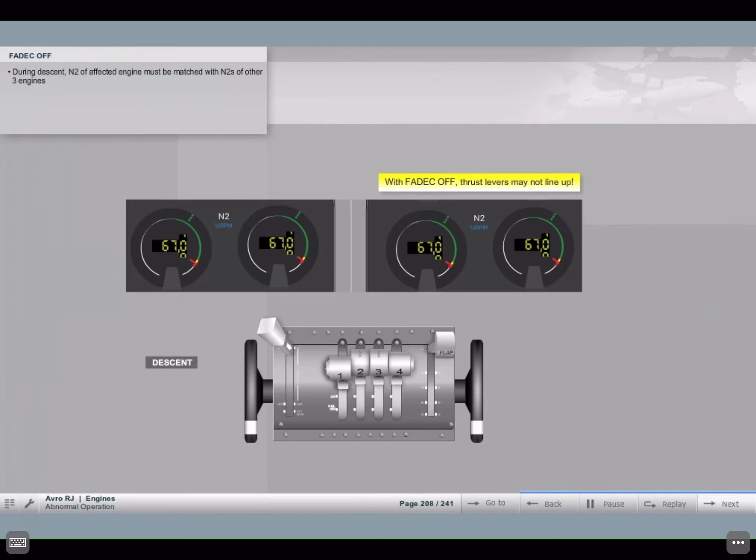In addition to engine anti-ice of the affected engine being on at all times, the following is mandatory to improve surge margins.

The auto throttle must not be used with any FADEC selected off.

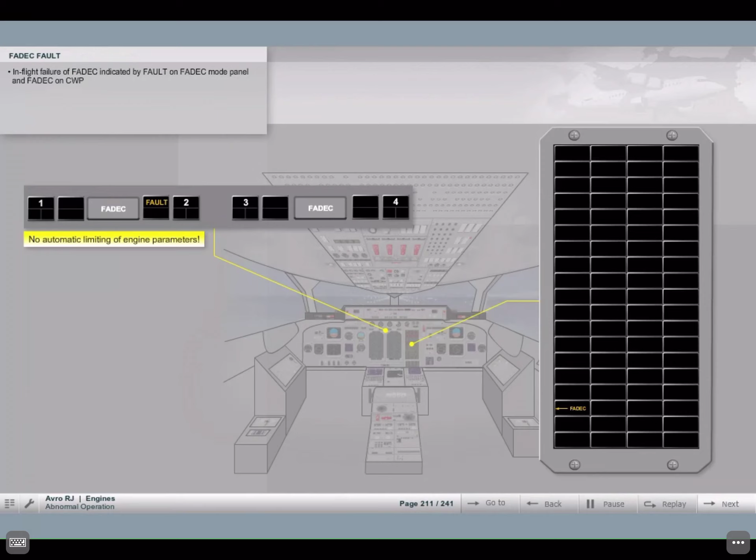In-flight failure of FADEC is indicated by a fault on the FADEC mode panel above the relevant engine. FADEC also illuminates on the central warning panel.

Let's have a look at the abnormal and emergency checklist. The abnormal and emergency checklist FADEC fault shows the two failure indications for verification. Let's go through the procedure.

This procedure tells us when at a safe height to disengage the auto throttle, turn on the relevant engine anti-ice, and if above 31,000 feet, to turn on the outer wing and tail anti-ice.

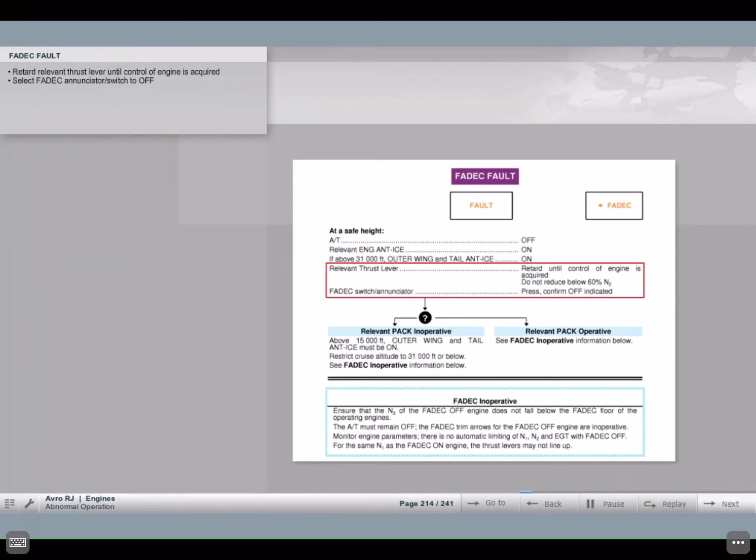Should the relevant pack be inoperative, outer wing and tail anti-ice must be on above 15,000 feet. Note the FADEC inoperative information below. This completes the A&E checklist FADEC fault.

Following severe damage to an engine, it must be assumed that fire is present. The engine fire caption of the relevant engine may or may not be lit depending on the failure.

If the red engine fire caption is lit, the firebell should be canceled. The correct memory item should now be executed.

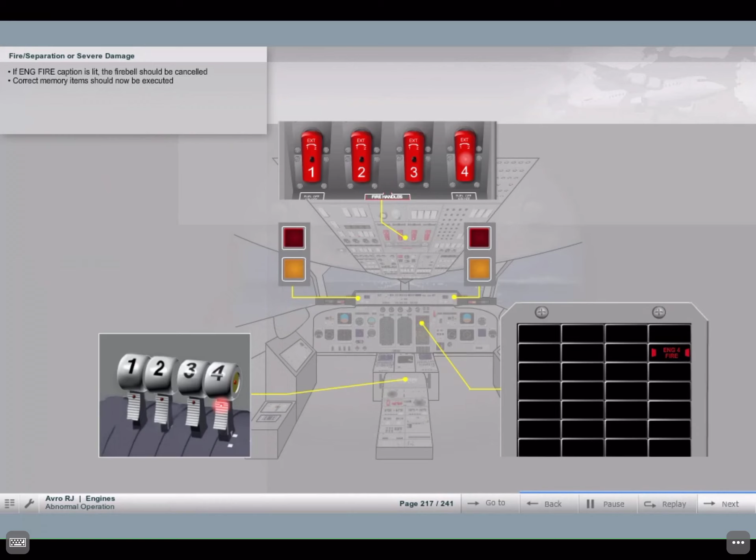The A&E checklist engine fire, separation, or severe damage consists of memory items only, which the crew must know by heart.

The relevant thrust lever is confirmed by both pilots, then moved to idle, and then to fuel off. This closes the engine high-pressure fuel valve and prevents fuel from reaching the engine.

The relevant fire handle is pulled to the first detent. This action is confirmed by engine fire handle illuminating above the red warnings on the central warning panel.

After confirmation, the relevant fire handle should be twisted through the detent and pulled to its full extent.

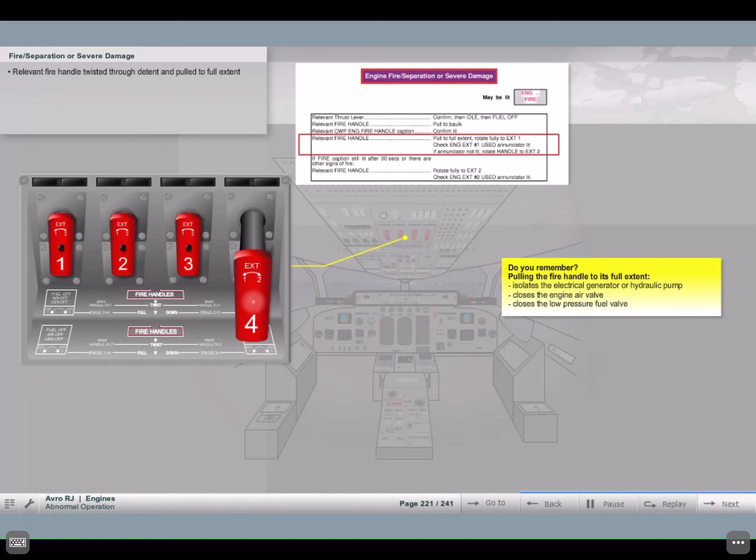The fire handle is now rotated to extinguisher 1. Should the engine extinguisher number 1 used annunciator not be lit, the handle must be rotated to extinguisher 2.

If the fire caption is still lit after 30 seconds or there are other signs of fire, the relevant fire handle must be rotated fully to extinguisher 2.

As with any fire on board an aircraft, timing is critical and the aircraft must be landed as soon as possible. On ground, if the fire is confirmed, an evacuation must be initiated.

If time permits, the engine shutdown subsequent action should be accomplished. Let's have a look.

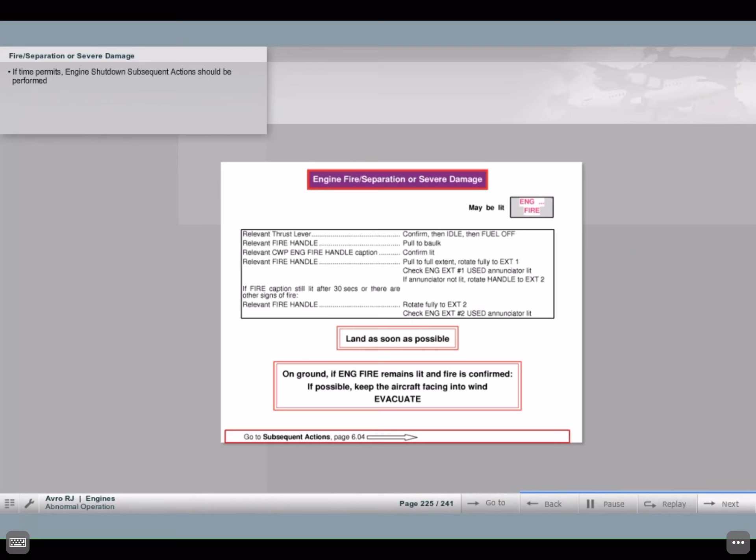An engine failure reduces the performance capabilities of the Avro RJ. Therefore, the TCAS should be selected to TA only.

If an outboard engine has been shut down, the relevant generator should be selected to off, reset. Within its limits, the use of APU should be considered.

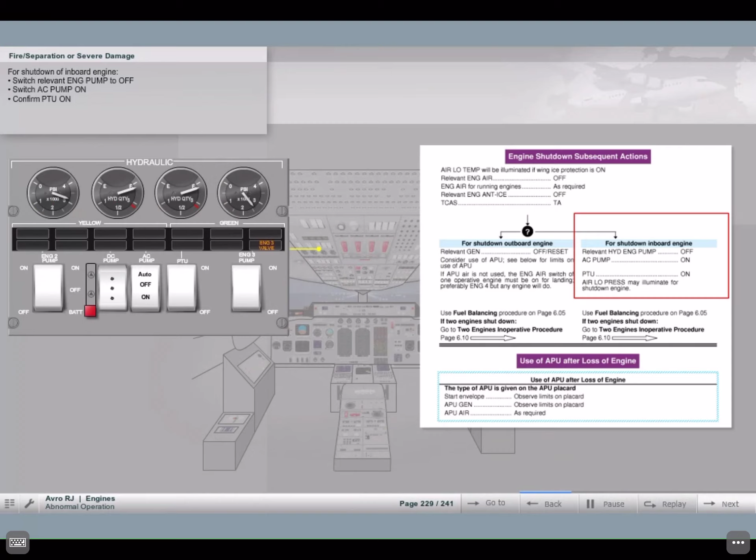Use the fuel balancing procedure or the two engines inoperative procedure if required. This completes the A&E checklist engine shutdown subsequent actions.

Warning of low pressure is given by an oil low pressure annunciator on the central warning panel.

The A&E checklist engine oil low shows the red oil low pressure annunciation for verification and tells us to check the relevant oil pressure indicator on the triple gauge.

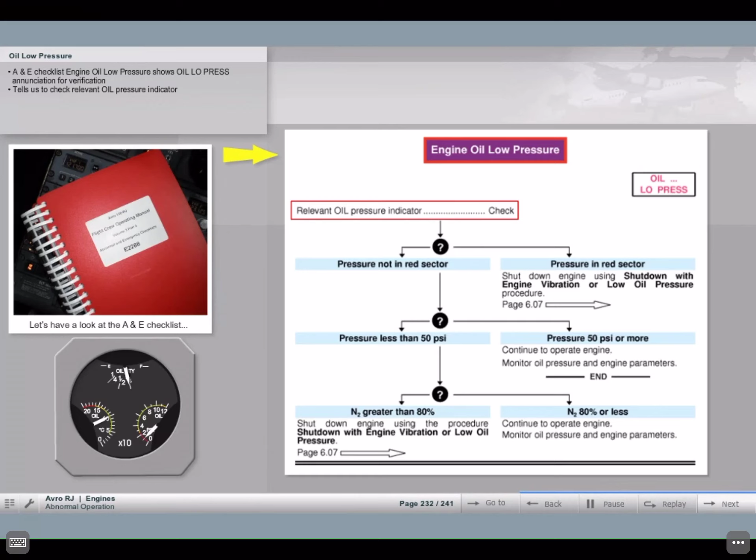If the pressure indicator is in the red sector or below 50 psi N2 above 80%, the engine should be shut down.

If the oil pressure is above 50 psi or above the red sector with N2 less than 80%, the engine may be left running while monitoring its parameters and oil pressure.

An engine vibration value in excess of 1.2 will illuminate engine vibration on the central warning panel. The engine which generated the warning must be identified by looking at the PED.

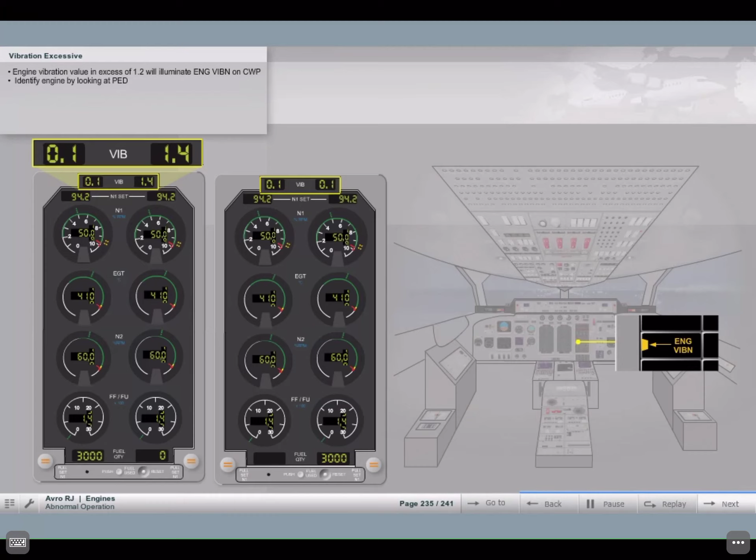The abnormal and emergency checklist tells us to turn off the auto throttle and TRP and check for any confirmatory signs of engine malfunction.

If engine malfunction is not evident and the vibration level of the relevant engine does not vary with N1, an indication fault can be suspected, and the engine may be left running while monitoring its performance.

If vibration does change with N1 and the vibration level can be kept below 1.2 units, the engine may be left running while monitoring its performance.

However, should an engine malfunction be confirmed, or if the vibration level cannot be kept below 1.2 units, the engine must be shut down.

Click on the different parts of the table to see related notes.